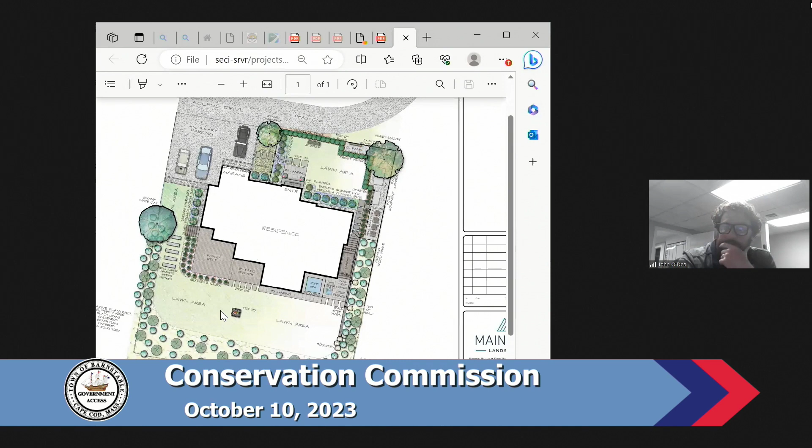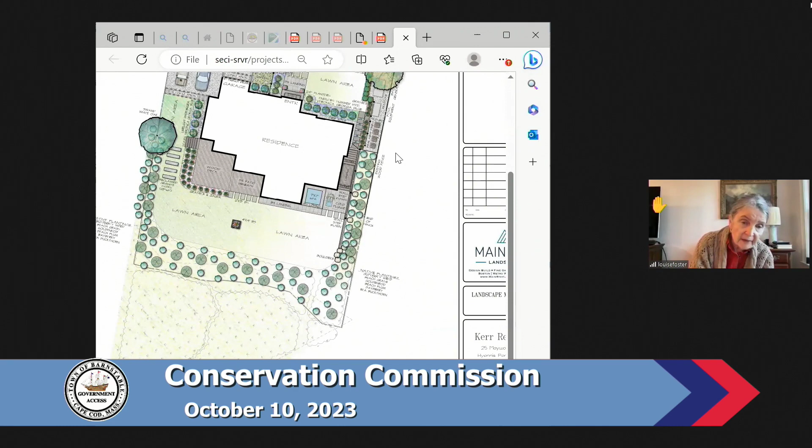Question from the commissioner? Louise? Hi, Chuck. Where does the extra mitigation go? So the plants that we've added are in this area right here, shown on this plan. Okay, along where the wetland is, right? So if we switch to the engineering plan, this is the top of the state definition only, and this is the top of the town bank definition. Okay, so it's along the top of the town bank, more or less. Yeah. Okay, thank you.

Any other questions from the commissioner? John? Yes, please - where is the 50 foot from the town bank on this plan? Right here where it says 50 feet. Oh yeah, there it is. So everything you're adding is within the 0 to 50? Not everything - what we've asked for is outside the 50-foot buffer. Yeah, right, but these stones here and those steps going down and the fire pit are in the 0 to 50, correct? Yeah, I know it's not completely conventional, but the granite steps really are for safety - we wanted to put them in to decrease any kind of killing of the grass when you walk out of the house, because it has sliders right here.

And we do know that it's in the 50-foot buffer. If you look here, if you go by mitigation requirements, we're required about 3,700 square feet of mitigation planting, and we're more than twice that between the Phragmites, the dune restoration, and the bank restoration. It's all in consultation with Wilkinson.

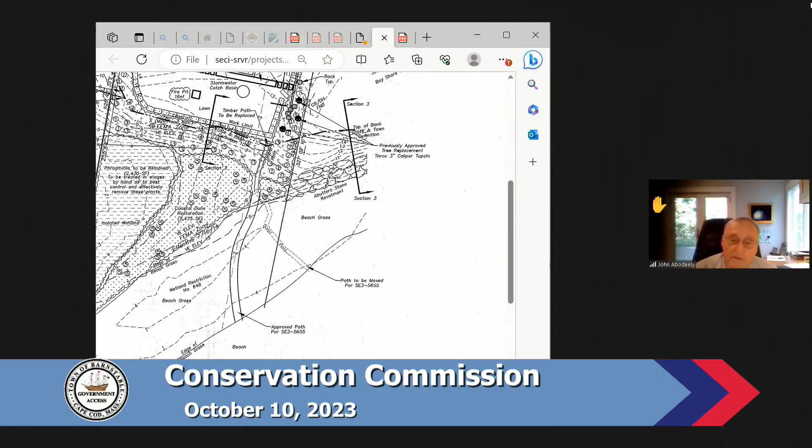The only issue that jumps out to me, honestly, is that location of the fire pit in there. Because fire pits generally are surrounded by gravel or something for a seating area and use of that. So I must say, I would be dying to hear Bill Hearn's comments, but whether that's a concern or not, that I would have. Chuck. Fair comments.

Thanks, John. Bill? I'm not at all familiar with this site. I didn't go, I didn't have the plans, so I'm just shooting from the hip here. When you were responding to Louise on where the mitigation area was, that's like a new planted area, because this is a project that already presumably was approved and had some kind of mitigation.

So you're not planting on top of a mitigation area that's already in existence, are you? Essentially, we're adding plants to an area that we've already said that we're enhancing. So, I mean, is it true mitigation? No, we're not planting lawn. So we're adding plants to a previously approved bank restoration area. But the idea of a mitigation area is that you're going to let it effectively grow wild. You're not mowing, you're letting Mother Nature take its course, and you started presumably with the old mitigation, you've got a bunch of plants in there, but to me it seems like you're double dipping. So I have a concern with that, one.

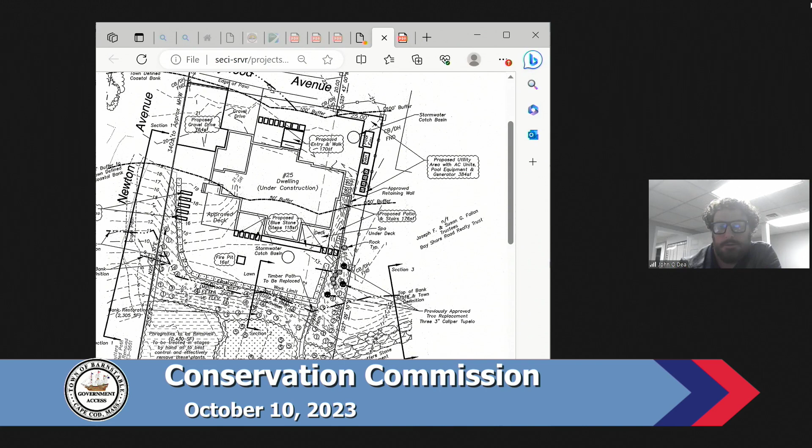I think so, but I hope that we can come up with some common ground here, because there's no way I'll be able to convince my client to give up the rest of his yard for the fire pit. No, I'm not talking about the fire pit. I'm talking about other elements of this project which would also bring forth mitigation. Maybe you say you're going to use some of that extra mitigation to cover the additional elements of the project, but I don't think you ought to be bookkeeping by saying that you're going to mitigate for the new parts of the project and then put the plantings superimposed on what you already agreed to do.

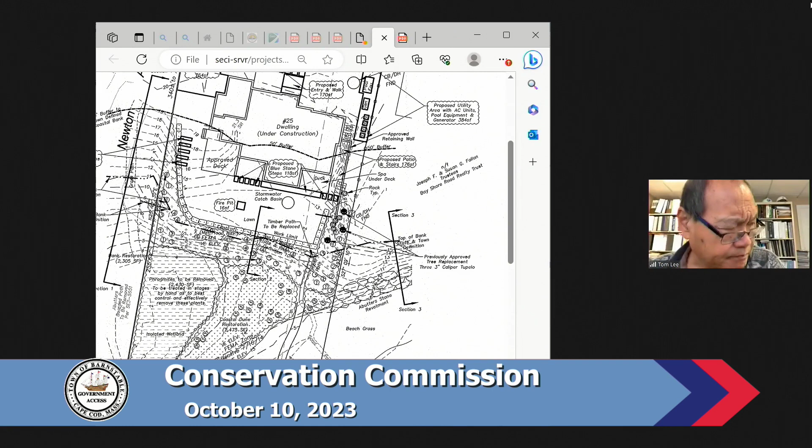Thanks, Louise. John? Yeah, am I muted? I think the issue for the commission, Louise and Bill, is, and I'm glad you pointed it out, the applicant is not increasing the area of mitigation. I didn't realize that. They're adding some additional plantings within the previously approved mitigation area.

But the issue for me is, given what they are asking for, and given that the mitigation offered in the original application exceeded any required mitigation, it seems to me Chuck should be saying to us, as the commission, as has been done in the past, have realized that we've offered, quote, excessive mitigation, and therefore would like to take advantage of that and add these additional items within the 0 to 50.

But they've gone a little bit beyond that, and they said, well, not only did we give you more mitigation than previously required, we're even increasing a little bit by adding some more plants. But I think that the point that Bill and Louise made is correct. So to me, the commission has to say, do we want to give them credit for the, quote, excess mitigation offered in the original application?

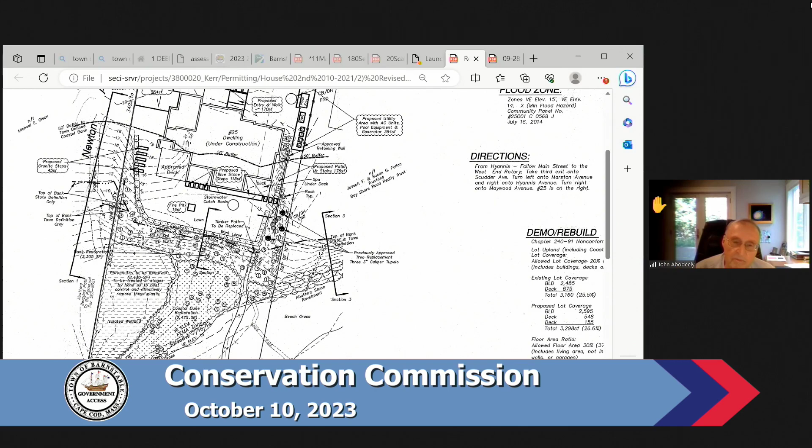I'll answer that for myself, at least, that I'm okay with doing that. I am not okay with the fire pit, but I am okay with the other parts that they're asking for. My own personal opinion on that. Yeah, I would agree with John on that. In the past, sometimes the applicant has done more mitigation than they require, and a lot of times they're banking the credit, and then they're using that for some additional built hardscape in the proposed area, similar to this one. So I think I'm fine with that in terms of that interpretation.

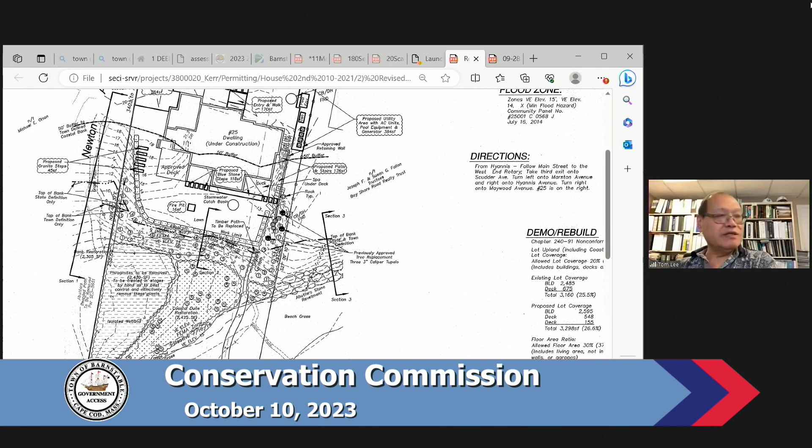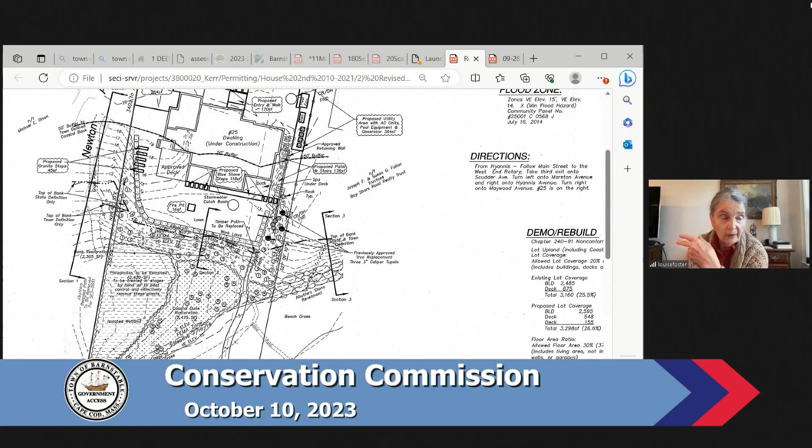But I think Chuck, if we remove the fire pit, is that an issue that you have to deal with? You have to get an answer from your clients. Well, also, I think from a bookkeeping point of view, with the idea that they could come back in a couple of years and say, well, I hope I got to bank the extra mitigation that I put in, I think we want to make sure that extra 771 or whatever it was isn't counted as even more mitigation.

In other words, the process should be, as John described, that the extra mitigation that they offered to begin with would cover the additional items in the project, but that we're not going to say they have given us more mitigation on top of that. Or phrased another way, they've used it up. Yeah. Right.

Can I ask a question? Sure. Before you even get to mitigation, was this revision to add all these things? These were not on the original plan. In other words, not just the fire pit, but the stepping stones, additional parking, utility area, bluestones, all of that has been in the revision now? This mitigation is supposed to cover all of those adds this time around? Yes, ma'am. So the things that were bubbled are the revision blocks in the mitigation calculations. So there's a lot of adds in this revision.

I mean, it was like 320 square feet of add with a 7,000 square foot wetland and bank restoration area. So I don't think it's as big as some of these projects that I've been working on, but sure. Yes, those are what is proposed in this revision. So after they did these mitigation proposals, then they decided, hey, we did so much, we can add all these things to this now. Is that what you're telling me?

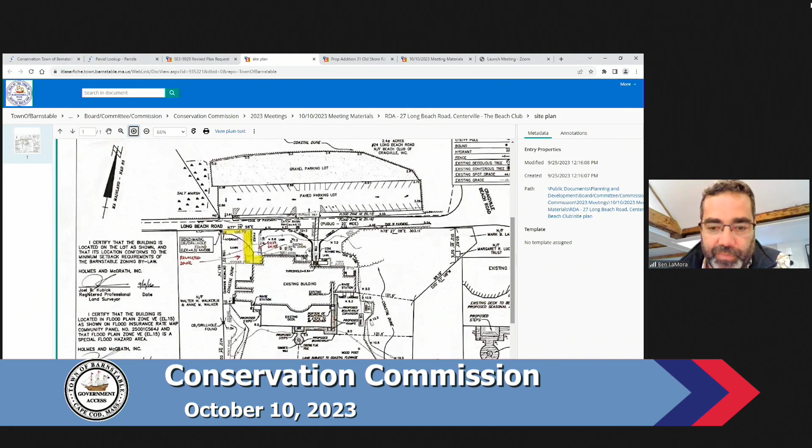Sorry. There's a new loading dock ramp that's being built right in that area. So you should have a page in the application that shows the profile of it. But right now the trucks back up as close as they can get to a concrete pad on the front of the building, and then they run an aluminum plank off of that. And the idea here is we're going to have a wooden ramp built out over the tar there that goes down to grade, and that will be used to get to the new 4-foot wide doorway to bring product in.

Thanks, Ben. Any questions from the commissioners? Louise? When I was there, I saw your marks, the spray paint. I didn't see any stakes. And in the area toward the water and beach, in your drawing, you've got several small things: proposed boardwalks, proposed ramps, and boardwalk expansion. I didn't see any markings there.

They're small. You know what? That drawing, what I did was I just showed the new work that was proposed. That drawing was actually produced years ago for the work that did get approved and then was completed. So those were old work notes. And I'm sorry that was confusing. On the site plan, the new work is what I highlighted and painted. Okay, great. Thank you. Oh, sure. Thanks, Louise. Anyone else? Any other questions for Ben?

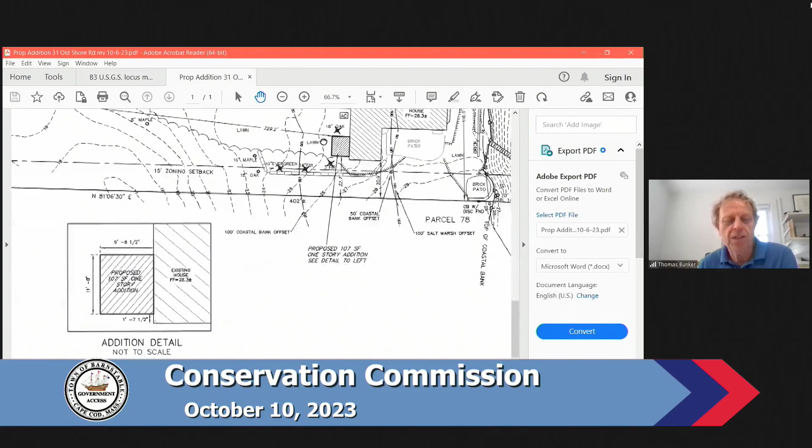This one does not actually have to come down for this project, but this oak tree here and these fir trees will have to come down to construct this. That's what's being proposed at the moment. I can take this down or leave it up, however you would like. I'll leave it up there.

Tom, what is the revised date on this plan? The revised date is October 6th. Okay, thank you. Any question from the commission on this? None. Channel 18, any public comment on this? Seeing none. Could I have a motion to approve this project with the revised plan date October the 6th as a negative determination? So moved.

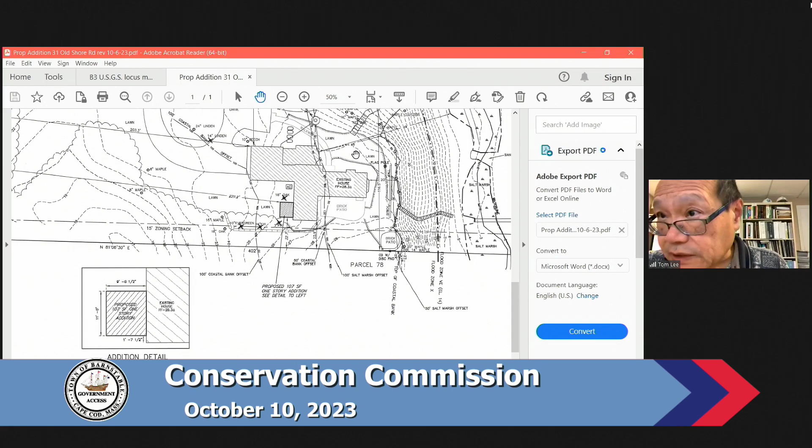Second. Roll call. Agnew, aye. Lee, aye. Byrne, aye. Foster, aye. Abodeely, aye. Gilmore, aye. That is unanimous. Good luck, Tom. All right, thank you very much.

Abstain. Oh, there's Pete. Pete. Here. I didn't see you join us, Pete. I just saw his name show up. I will put him on at 4 o'clock even. Yep. All right, thank you.

We have three NOIs this afternoon. The first one is Putnam Property LLC to construct a balcony, 2 patio areas, and a flagpole at 20 Scallop Path, Osterville, as shown in the assessors map 070 parcel 010-002. Good afternoon, John O'Dea from Sullivan Engineering Consulting. I'm here for this one representing the applicants. I will bring up the plan for us.

This is a 3+ acre parcel on Oyster Harbors abutting the Seapuit River. It's one of many parcels owned by this family for probably over 50 years. We have an existing dwelling on this site that, according to the assessors, dates to 1770. And we're looking to do some very modest improvements to it. There is a 6-foot balcony proposed off of the back of the house. And then there's a brick patio that's beyond the 50-foot buffer, but still within the 100.

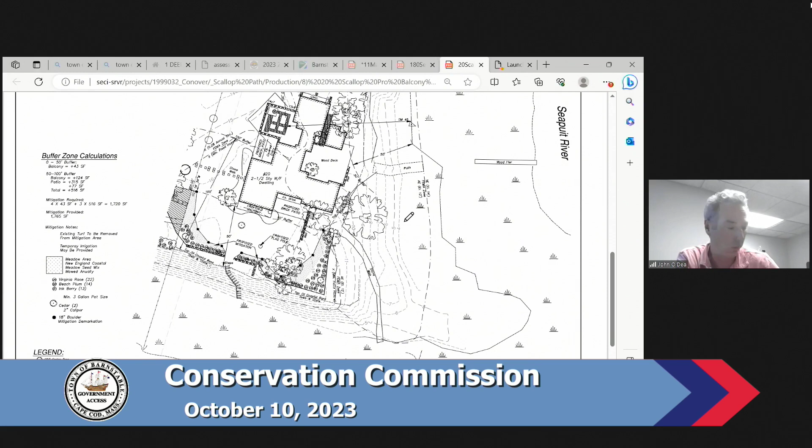If there is such a thing as a standard condition about future plans for lighting, it should be these downward halo flagpole lights. We'd love it. And if you don't want to talk about it and just say it's not lit, then that's okay too. Get back for a revised plan if you had to do it. I'd leave it up to Darcy or Ed or whoever knows more about that than I do. Thanks, John. I mean, if the applicant has not requested one, why include it? So I agree, Tom. Any other questions from the commissioners?

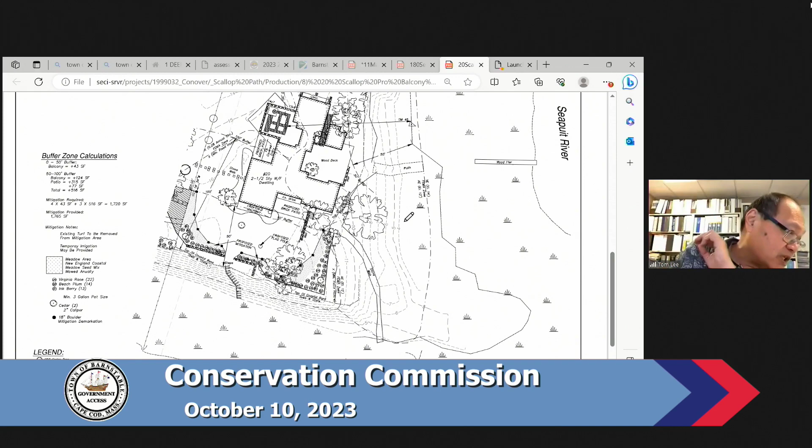Any public comment on this? Seeing none. John, we don't have the DEP number. Am I right? You are right. So we'll need a continuance for this. It would be like October the 17th. Would that be okay with you? Yes. Yep, that would be fine. Okay.

Could I have a motion to approve this project with the revised plan date of October the 7th? And we need a continuance to October the 17th, waiting for the issuance of the DEP number only. So moved. Second. Roll call. Sampu, aye. Agnew, aye. Lee, aye. Kern, aye. Gilmore, aye. Foster, aye. Abodeely, aye. That's unanimous. Thank you. Good luck, John. Thank you very much.

The second NOI is Hamilton Shepley. Proposed detached 2-car garage with attic above at 21 Forest Street, Hyannisport, as shown on Assessors Map 266, Parcel 006-002. Matt? Yes, good afternoon, everyone. For the record, Matthew Eddy, professional engineer with Baxter Nye Engineering and Surveying, representing Tony Shepley, the applicant, on the NOI that's submitted before you. Is it okay if I share my screen? Yes, please.

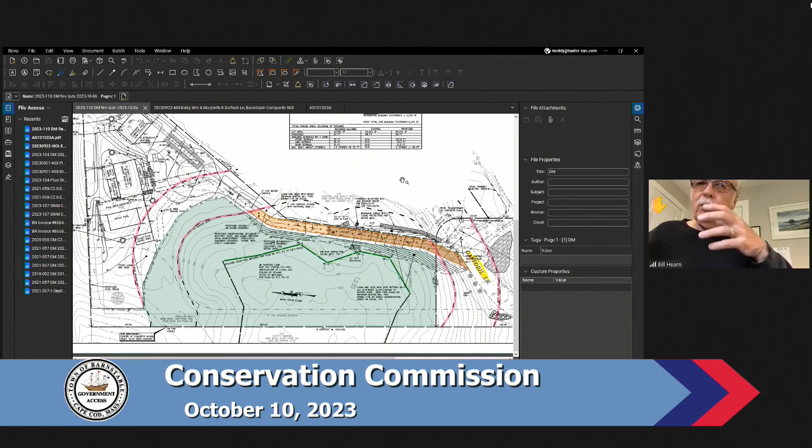Has anyone explored getting a right of way from the landowner? It's not anything that they're interested in. Yeah, they're not interested in doing that. As this commission probably knows, when you get into shared easements for access on driveways, it creates issues with homeowners down the road. We've dealt with so many projects where homeowners come back in after the fact having issues with the shared driveways. They don't want to have a shared driveway access.

One last question. Was a shared access even explored with the owners of that parcel that has the road that goes directly back? It's an undeveloped dirt road. Did anyone ever approach them and say, "Hey, we'll give you $100,000"? It was not part of what they wanted to do. Yep, they don't want to have the shared driveway access.

Bill, we have seen a lot of shared driveways initially approved, and then a few years later they come back and ask for their own driveway to the property. And in the past, if I remember right, we always allowed access on their parcels to the upland side to the house. Louise? What is the surface of the driveway?

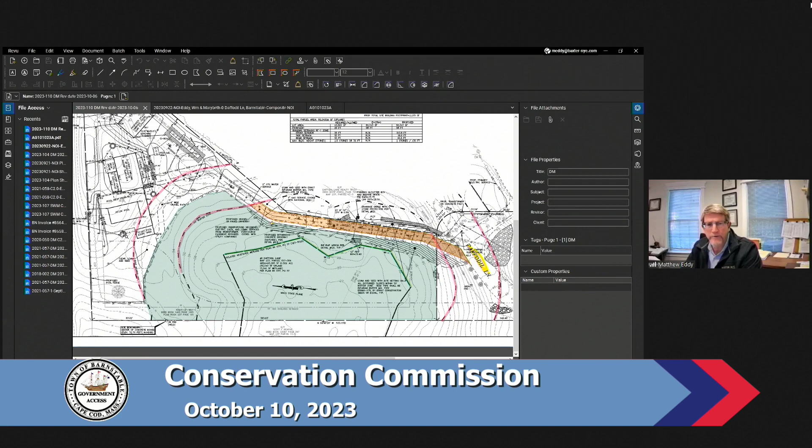Let me just ask a tiny little follow-up. Will there be a demarcation for all this extra buffer beyond the 50 that is being offered? Yeah, absolutely, we can do that. We can put in the standard demarcation that the commission requires, whether it be via stone or via single rail fence, etc. Good, thank you.

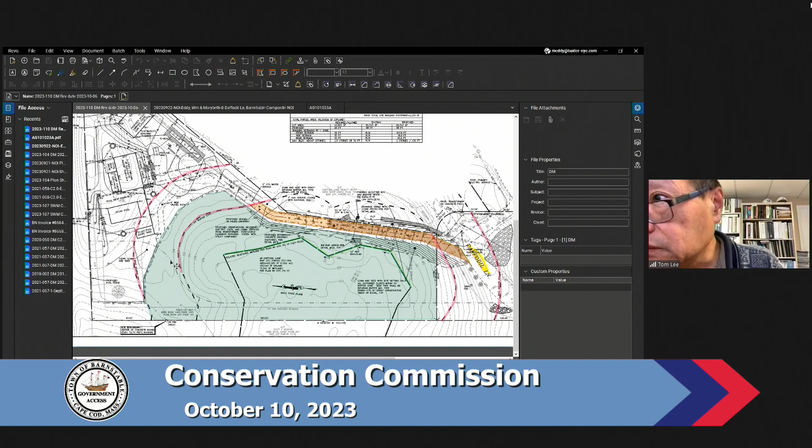Thank you. Any other question from the commissioners? Seeing none. Channel 18, any public comment on this? Seeing none.

I have something to say. My name is Rebecca St. Ange. I am currently on an iPhone, I'm not on the screen. My husband, Matthew Borden, and I abut the property, and I just had a couple concerns I wanted to address. Go ahead.

So we purchased our home next to, I'm assuming, the original home that the Eddies built and owned, in December of 2016. A couple of the concerns I have with the project are the size of the house, it's fairly substantial, and what one of the committee members has already mentioned is a significant natural resource in the Great Marsh of Barnstable. It's pretty substantial what they want to do down there, and adding the pool in is also a concern. So they are going to have to basically bulldoze, steamroll woodlands for the access.

There's a reason the neighbors probably don't want to give them access to that type of a project. That's just my observation. Another concern I have is that they have not been really good stewards of that property down at the bottom there. We call it the bottom because we walk down, our property is directly adjacent to it, and we walk down into the Great Marsh and to the Audubon property all the time. And it's just not a very well-kept site. There was debris of tarps and chairs and things for quite some time. And you could see the leavings of what was the original, looked like the berm or the bale for the original project.